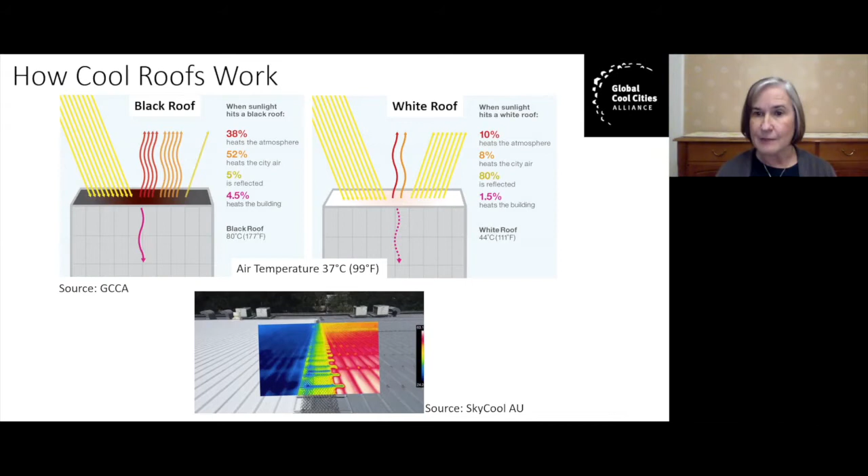Under a typical black roof, when the sunlight hits the black roof, large amounts of the heat go to heating the atmosphere and the city itself, the surrounding area. Only 5% is reflected, and almost the same amount, about 4.5%, actually goes in and heats the building. In contrast, when we have a cool roof, you have the majority of the heat being reflected, about 80%, and only 1.5% actually heats the building. And also useful, only about 8% heats the city, with about 10% heating the atmosphere. So you can see the very stark difference of what happens within the building and the atmosphere when you have a cool roof versus a traditional dark roof.

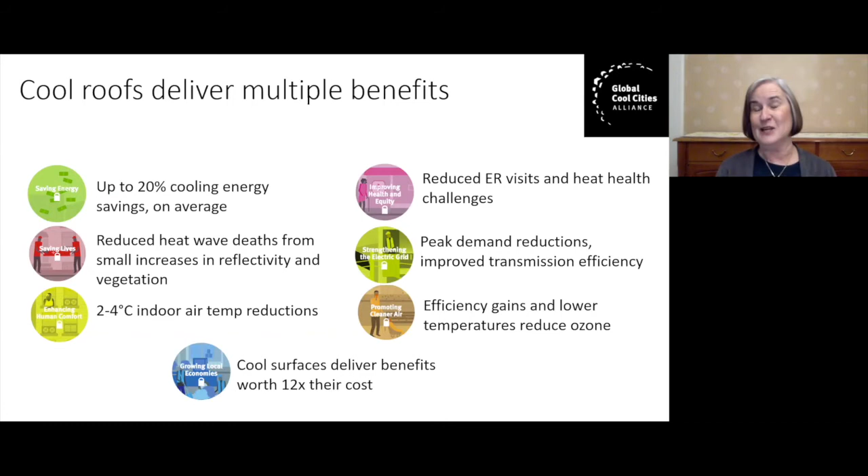The benefits are really multiple: you can have up to 20% cooling energy savings on average, but you have health benefits by reduced heat deaths, reduced visits to emergency rooms. Because you're not using as much air conditioning, you have reductions in your peak demand, which can lead to needing less transmission. And you have efficiency gains and lower temperatures, which can reduce ozone. So when you collectively take into account all of these benefits, cool surfaces deliver benefits worth about 12 times their cost, which is why I and GCCA are really excited to be part of this international effort.

So there is a lot going on around the world, and I'll just point out a couple things in Australia, and again, I'm sure we'll talk about it more, that some studies have been done. If all the roofs in Sydney would convert to cool roofs to reduce the average urban heat island, it could be a reduction of 0.6 degrees Celsius. And then if you added in cool pavements and trees, it could be 1.3 degrees Celsius. Sydney's climate is expected to heat up by 0.7 degrees Celsius by 2030.

So if there were a massive undertaking on cool roofs, we could actually delay the impacts of this heating by almost a decade. And similarly with Melbourne, if you converted about 60% of the roofs to cool roofs, this would reduce the average urban heat island effect by about 0.5 degrees Celsius and up to 0.82 degrees with vegetation.

So my takeaway that I want to leave with you on this is that we have the technology. We really have lowered the cost dramatically. There are multiple benefits, but what it means in terms of addressing and mitigating climate change is enormous.

And that's why I thank everyone for letting us have the panel at this conference.

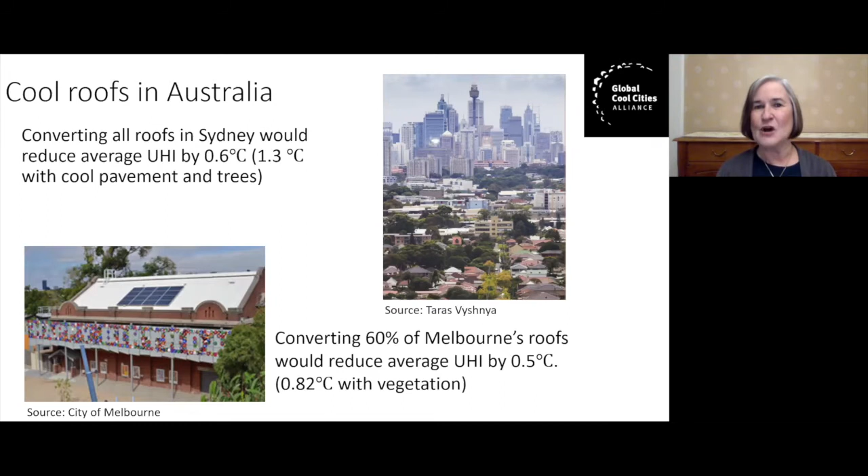So I'm just going to close with, we at GCCA would love to collaborate with any of you in Australia. A couple things listed here: knowledge exchange with local governments about, what are the techniques for this? What are some of the research projects that can be done? With APEC, we're working on cool roof testing, a standard harmonization effort. It would be great to involve Australia. And then one exciting new effort that we're launching is what's called the Cool Roadways Partnership, where we're around the world trying to set up demonstrations that really help us understand cool pavement technologies and bring down their costs.

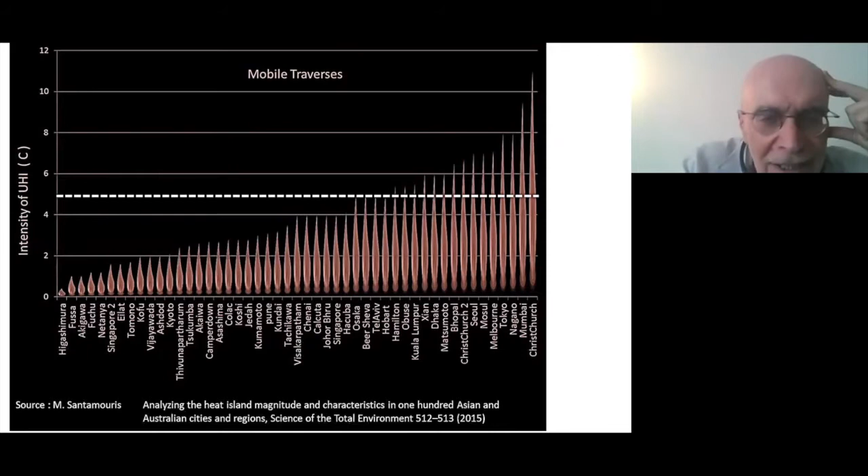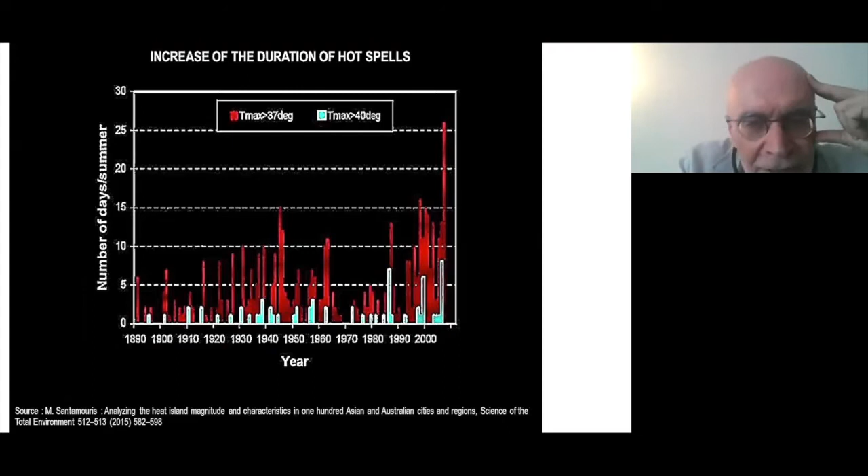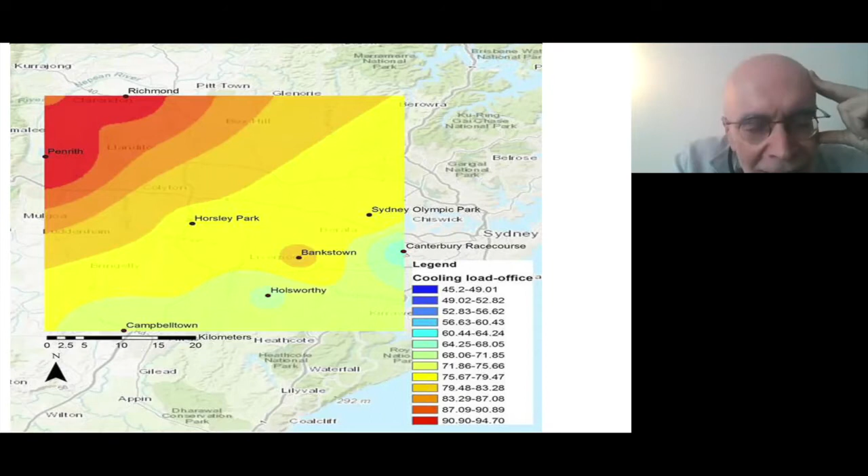Once we calculate the cooling demand of buildings in the western and the eastern part of the city, you can understand that in the northwestern part of Sydney, the cooling demand because of the urban overheating and the urban heat island is about 3 times higher than in the coastal area of the city. It's not just that. Urban overheating has a very serious impact on peak electricity demand, but also on health.

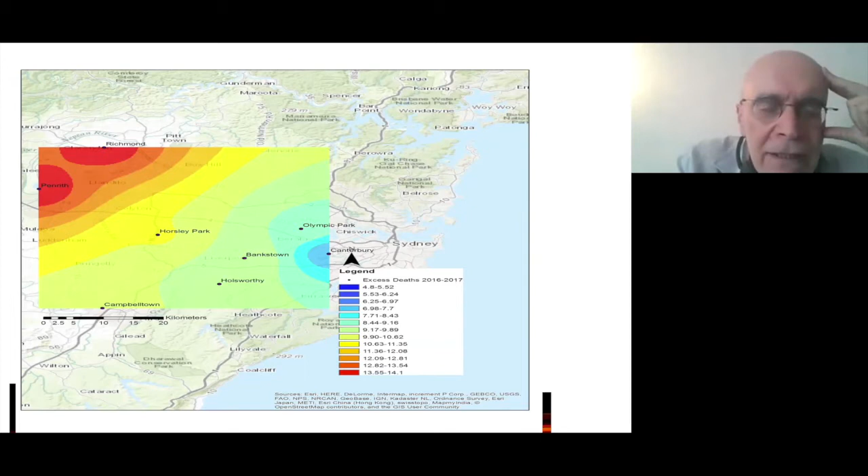This is a map of the heat-related mortality in 2016-2017 in Sydney, real data that shows that during the summer period, heat-related mortality in the northwestern part of Sydney, which is really overheated, was almost 3 times higher during heat waves than, let's say, in the eastern part of the city. So actually, the impact of urban overheating is very well documented.

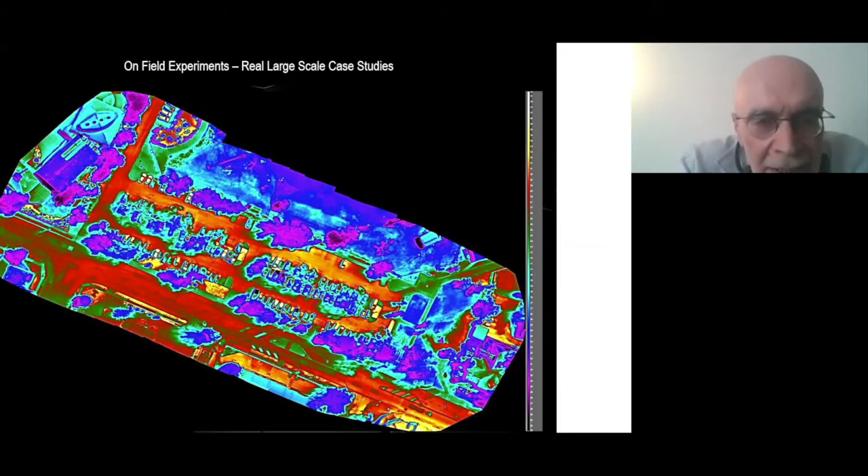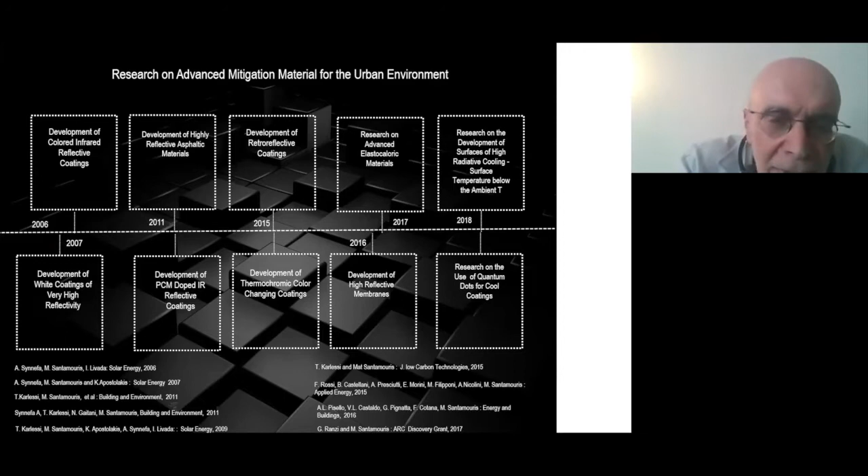The second important question is if we have technology really to decrease the temperature of our cities. During the last 30 years, there is very intense research that has really resulted in the development of very advanced technologies, especially materials technologies, starting from simple white materials, up to very advanced and sophisticated photonic materials that may reach sub-ambient temperatures. These technologies, which are available commercially, have been applied in more than 450 large-scale mitigation projects all around the world, and we have tremendous results.

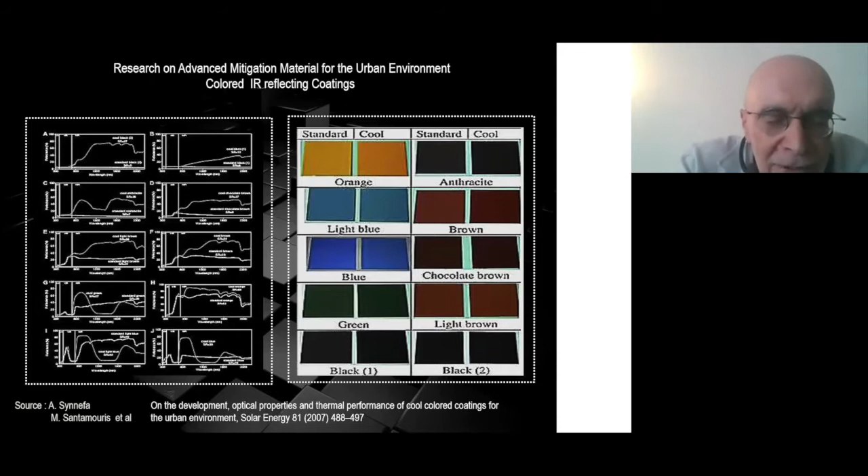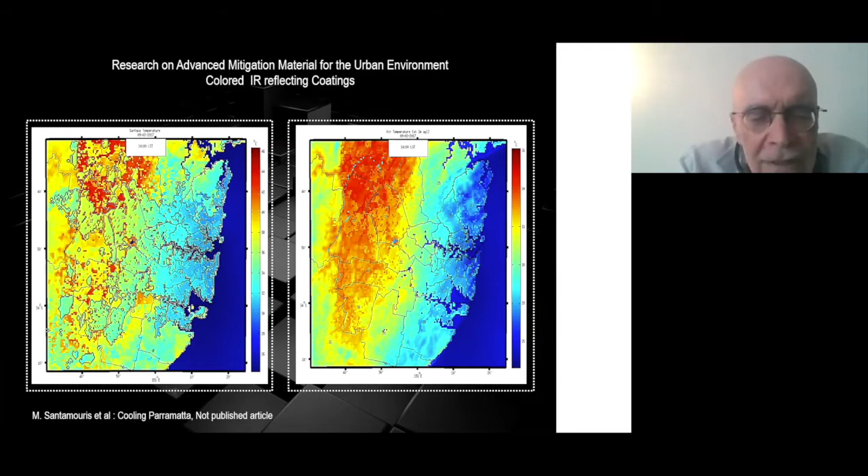What will happen, next one please, if these technologies and especially cool roofs and cool pavements are applied in Sydney? We have simulated the impact of cool technologies in the Sydney area, and as you can see from the two slides, the use of cool technologies in Sydney may decrease the peak ambient temperature during the summer period up to 1.5 degrees. At the same time, it may decrease the cooling load up to 30 to 35 percent and also decrease the heat-related mortality up to 40%.

Which is the potential of heat mitigation technologies? Some years ago, we started with something that was really simple. And gradually we moved to very advanced technologies like photonic, thermochromic technologies, and daytime radiative cooling. And actually, the results of more than 450 large-scale mitigation projects all around the world show that we are able to decrease the peak temperature in cities up to 2.5 degrees. We expect that in the next 5 years, with the development and the use of the new technologies, we may be able to decrease temperatures up to 4 degrees.

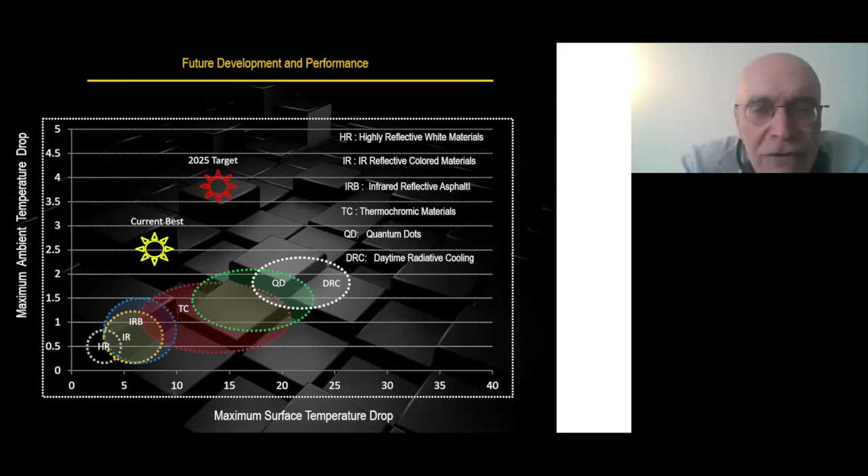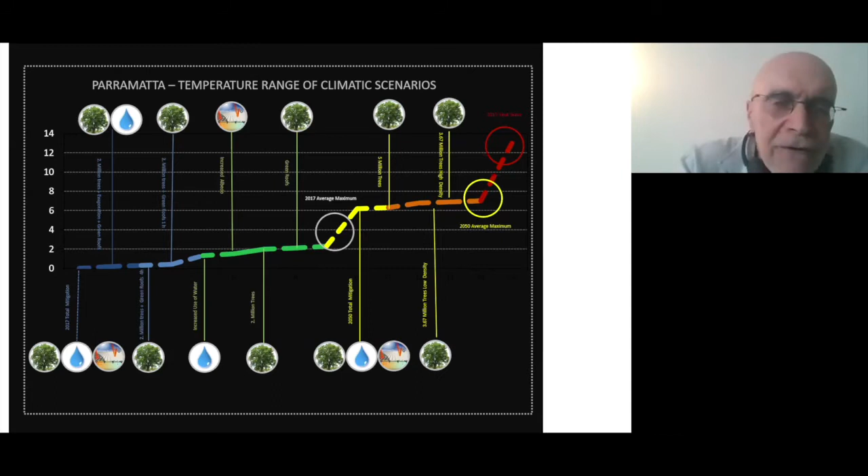So there is a major challenge about our future. This is a map that shows really where we are in Sydney and what will happen if we don't have a proactive policy. We are in the area where you see the circle. And in case we don't apply mitigation technologies in Sydney, we move towards, you see the right part, and by 2050, temperature in Sydney may increase up to 5 or 6 degrees. On the contrary, once mitigation technologies are used and a proactive agenda is adopted, we may decrease the temperature of Sydney up to 2.5 degrees, the left part of the graph.

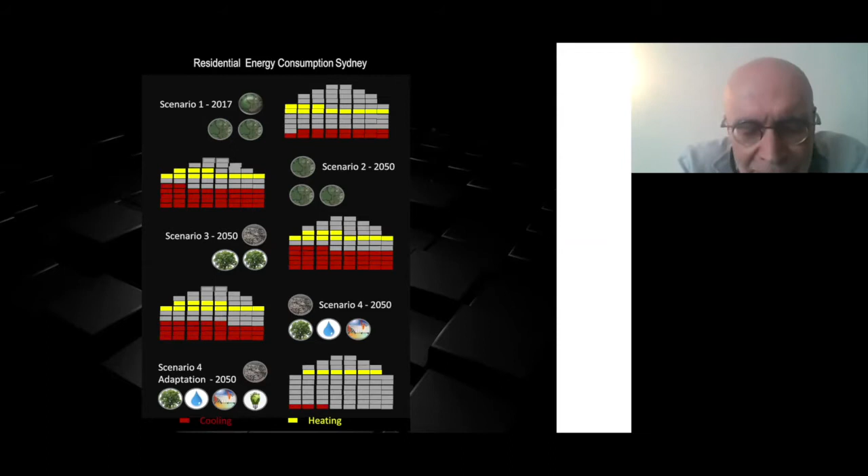This is very important in terms of energy consumption. In the upper part of the slide, you see in yellow the heating demand and in red the cooling demand of a residential building in Sydney. This is what is happening today. If we don't have any proactive agenda, no mitigation, by 2050 the cooling demand will increase by 3 times and the heating demand will stay almost the same. On the contrary, once we apply mitigation techniques, the cooling demand may decrease by 40% and the heating demand by 20%. But the most important is that once we apply at the same time mitigation and adaptation techniques, better buildings, we are able to decrease with the actual technology the cooling demand by 90% and the heating demand by 85%.

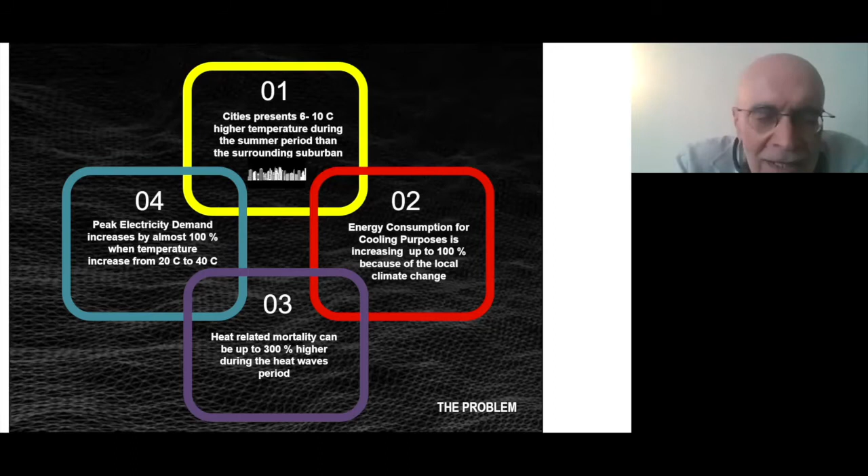So I think that it is obvious that urban overheating increases the temperature of our cities on average by 5 degrees, but sometimes up to 10 degrees. This has a tremendous impact on the energy consumption of buildings, up to 100, 200, 300% higher energy consumption. It has a tremendous impact on mortality and heat-related issues, and also it increases tremendously the peak electricity demand. This is what is happening actually.

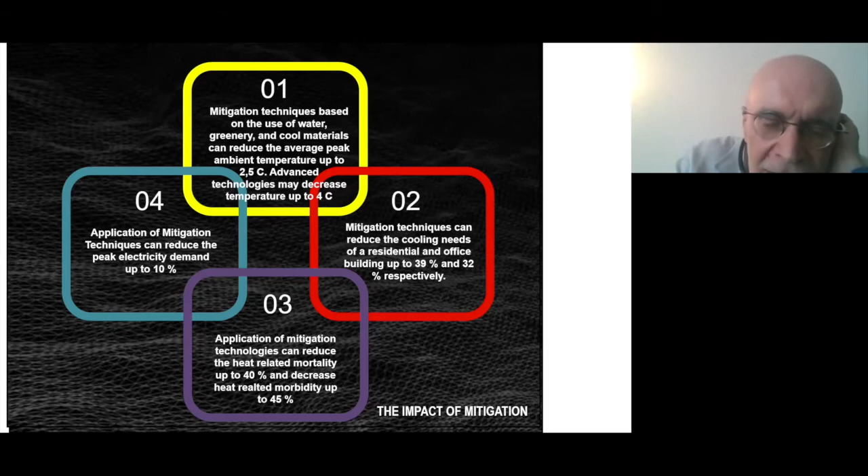Thank you very much. Matt, thank you so much for that. It was lucky I was muted there because I kept on taking sharp intakes of breath when I was looking at some of those charts.

And I think really what you highlighted there was not only the scale of the problem and the scale of the solution, but the really important social elements of this, because for anybody who's in Australia, you know, the economic divide between the west of the city and the center of the city is quite extraordinary, and seeing those impacts is quite stark.

Finally, I'm going to turn to Rex Lehman, who's the CEO of SkyCool, a company that specializes in cool roof technology and has really been leading the charge in the debate in Australia for the last 20 years. This is the first time I've really seen the enormity of the issue. Rex, we've had conversations about this many times, but this has been a very stark session about how serious this issue is. So I'm passing on to you to give your presentation.

Thank you, Rob. Okay, following pretty much on what Dian and Matt were saying, here's a small example of the heating effect in Sydney, which matters because the International Energy Agency is warning that there's going to be a massive increase, not just in the heating, but the demand for cooling is going to have a major impact in what we're talking about.

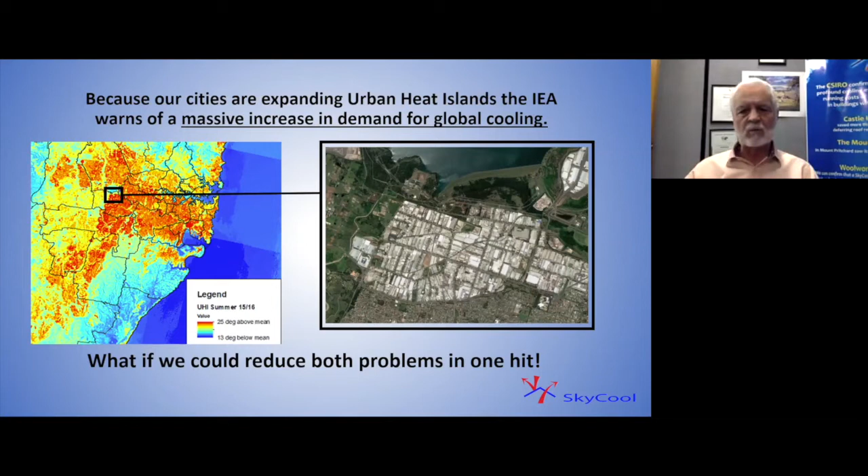Look at this little example here. Western Sydney, out near Prospect Dam, I've highlighted one little spot to show you what the source of that heat is. And it's those roofs, those industrial roofs that you can see in the expanded picture. So what would be fantastic would be to address that problem without increasing the demand for global cooling mechanically.

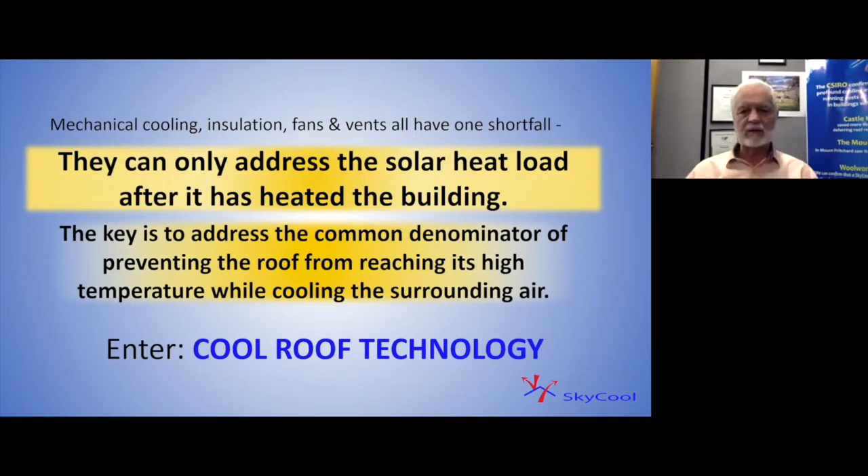The problem is that mechanical cooling, insulation, fans and vents, in a building by building process, are only addressing the heat after it has become the problem. So the key is to solve the problem before it even starts, before we have to turn on our air conditioning or any other mechanical or electrical draw. Why don't we treat the problem right at its very cause, or source? This is where cool roof technology comes in, at an individual as well as a city-wide and a nationwide level.

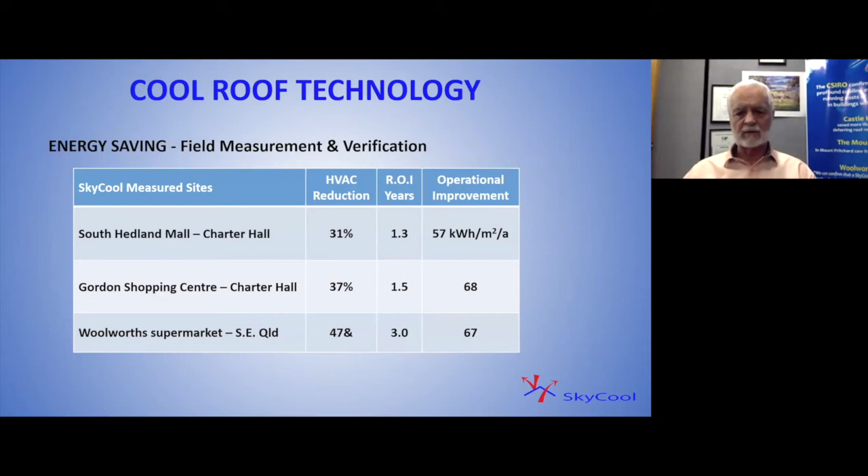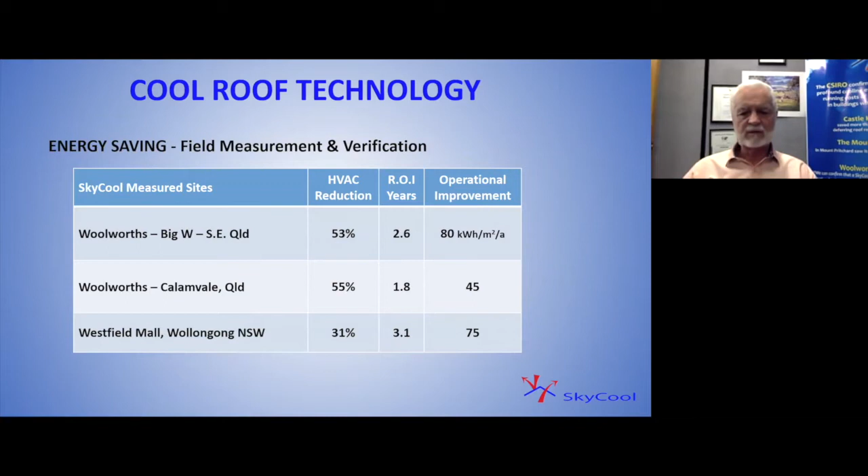These are some measurements of the energy saved through the use of cool roof technology. These are all our cases, although the measurements were taken by the clients. Look at the energy reduction in the HVAC, the air conditioning plants: it varies from 30 to 50% when you isolate the plant. In all of these instances the energy has been independently measured on the plant itself by sub-metering. The national average for our product is around a 42% reduction on those types of buildings.

These are all buildings that are wide span and roof dominated, as opposed to a tall city block, so there's a difference here. In these wide span buildings, like that picture near Prospect Dam, we've measured a rough average of 62 kilowatt hours per square meter per annum savings. We did that with our product, SkyCool, so called because we're using the sky to do the cooling rather than mechanical plant.

Now, the interesting thing about that emissivity is that it radiates through this sky window. That's 8 to 13 microns, which means that we're not heating the nearby air. So you get a multiplicity of benefits. You get removal of the solar radiation coming in, and you get the cooling of the building and of the surrounding air. So we're cooling the entire environment associated to that building.

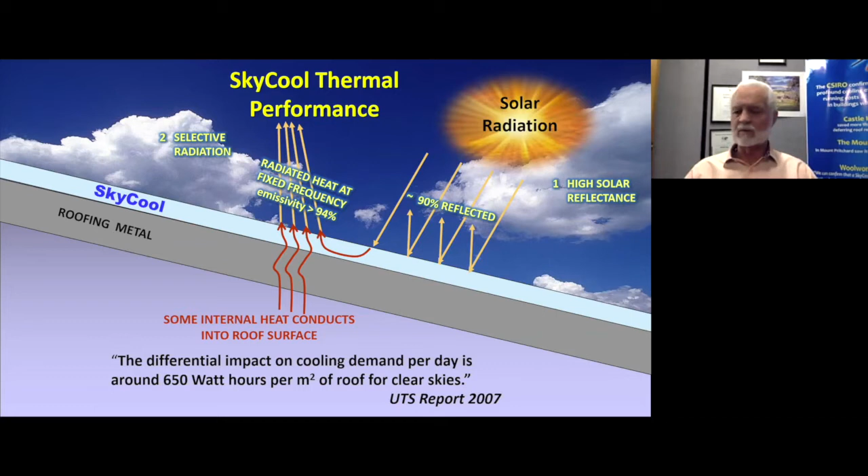And of course, once we coat it with SkyCool, that measured temperature with a FLIR camera showed that that roof was at 24 degrees under direct sunlight. And that was actually about 4 degrees cooler than ambient. So I think that's a fairly remarkable result, and has been repeated many, many times.

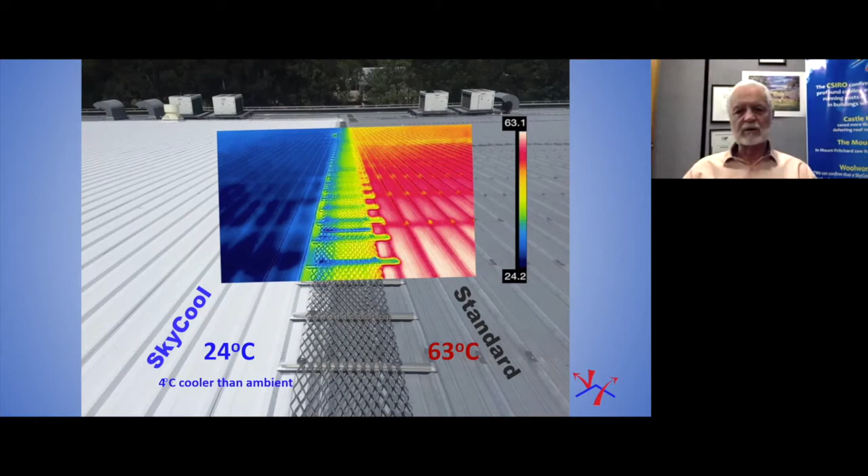Just a couple of examples of people that have used it. This is the Airports Council International. They did a case study on the use of SkyCool. Amongst many things they said in there, they said, as you can read, over an 18-month period, the SkyCool paint has helped to save more than 40,000 tons of carbon dioxide through the reduction in the air conditioning use. Now that's a remarkable number.

I think it's a remarkable figure because it shows not only are we cooling the environment, but we're reducing the demand for electricity, no matter how you generate it. Now in Sydney, most of our electricity, of course, is coal-fired generation, although that's gradually changing. But just to reduce electricity for any reason, or from any generator, is very, very important, I think.

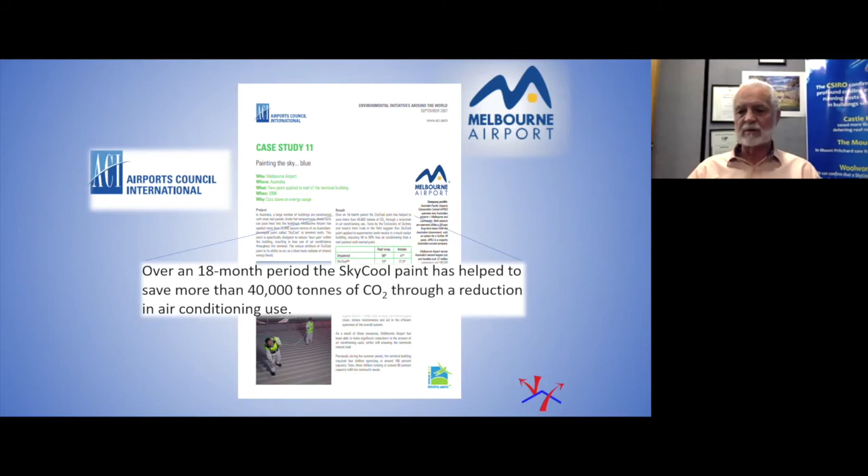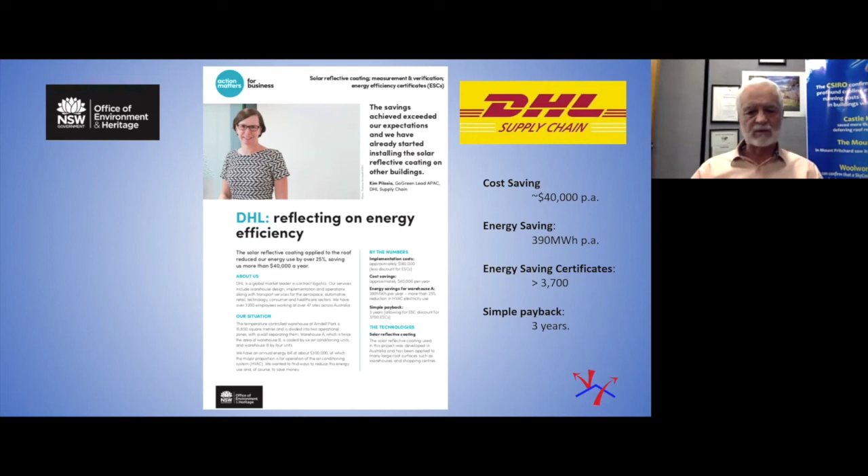This is a case study put on by the Environment and Heritage on a DHL project that we did. They reckon they were saving about 390 megawatt hours a year, and that earned DHL well over 3,700 energy saving certificates, which is a New South Wales carbon trading factor. So they got a great result on that, and the motivation for them, their payback was in under 3 years.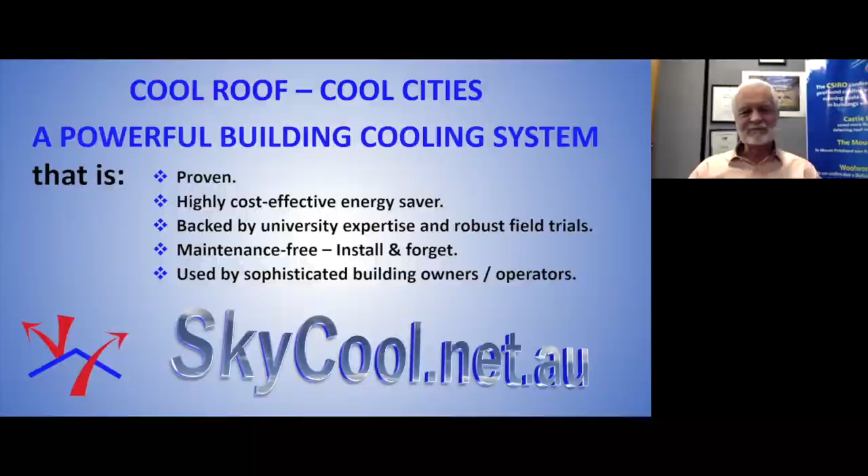So, as I mentioned, I've seen Rex's technology, and we've had conversations many times about it, but it was really interesting for me to see from Dian and Matt the actual synergistic benefits, the benefits well beyond the individual site, and the fact that this is actually an urban design issue. One building, it's great to see the savings there, but the impact that it has on the surrounding area and the impact of multiple buildings, pavements, and also roads and trees, and how those add together to make just a dramatic difference to, I almost say, the survivability of certain areas is quite extraordinary.

So I'm going to start with a fairly non-technical question. One of the things I have to say about this technology is that the problem for energy efficiency often is people say it's too good to be true. That's hard enough. With this stuff, it's like, really, a lick of paint is going to make that much of a difference to my cooling system, let alone to my city? That's quite hard to believe. And yet, the evidence is really uncontroversial. So it makes sense. You go to the Mediterranean, for example, and entire towns are painted bright white, and that's the traditional color. What is holding us back from doing this? Why do we still see so many dark colored roofs still being put in now, let alone retrofit?

First of all, I want to have a note of optimism here that we are in a radically different situation than we were 10 years ago. And so, yes, we see a lot of dark roofs, but it is changing. And you can think about there's two types of roofs. The flat roofs, we really have the technology there and the cost is comparable. And we've got lots of examples. So at least what we're finding in the United States is that the people who install the roofs are getting more and more knowledgeable about it. So they are offering it as a product because it's not a price premium and they can sell it on these benefits. And so we really have a market transformation that has occurred in many ways